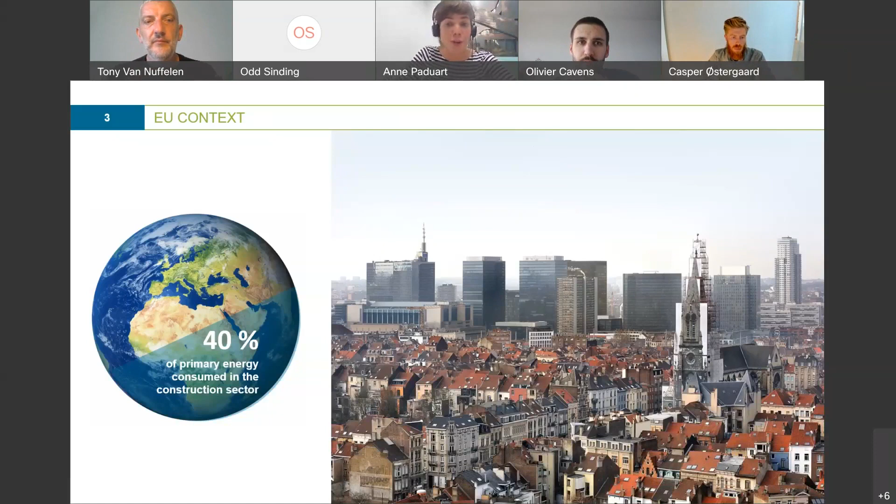We see that the building sector is actually a primary consumer of energy in Europe. 40% is related to all our construction activities, but also the emissions of greenhouse gases. When we look at the construction sector, it's about 40% due to the way we construct, the way we choose materials, etc. It's important to look at those numbers in more detail, because there are two points on which we can actually take some measures, take some actions.

So of course we see the energy parts, that 25 to 30% of the impact of the greenhouse gas emissions is actually related to how we live today, how we occupy buildings, how we heat and cool them, the technical equipment. And for sure that's something we've been working on in Belgium, in Europe, that we're trying to tackle.

But what we're not tackling yet nowadays is the remaining 10-15% that relate to the embodied emissions of the materials that we build with. So the selection of materials, looking at the embodied CO2 impact related to materials, but also how we assemble our materials in these buildings and how we keep them as long as possible in a loop.

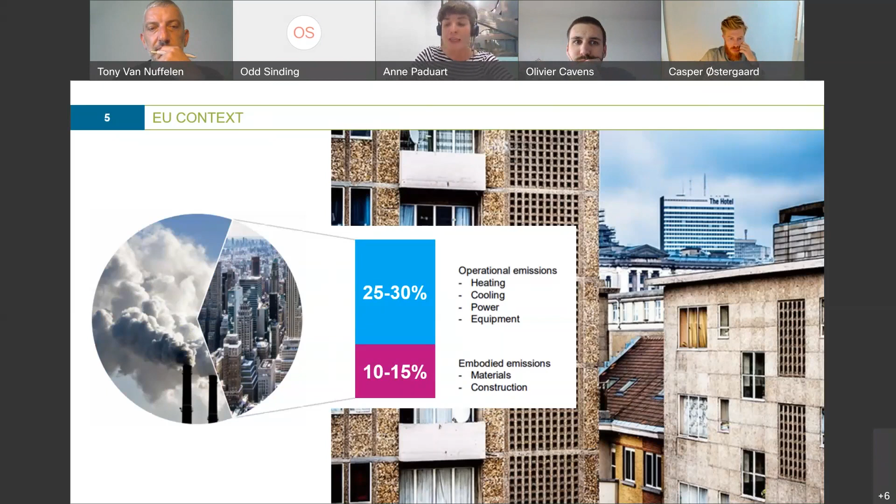That's something we should work on, and that's really the focus of circular economy: to try to reduce the way we put materials and deal with the waste coming from our construction activities. That's really, I think, the topic of today.

Besides, we already mentioned that when we look at raw materials extraction, 50% is due to construction, and in waste terms, 40% of the waste generated everywhere comes from demolition activities, but also from construction and renovation activities. So this is really an important attention point in Brussels and in Europe all over.

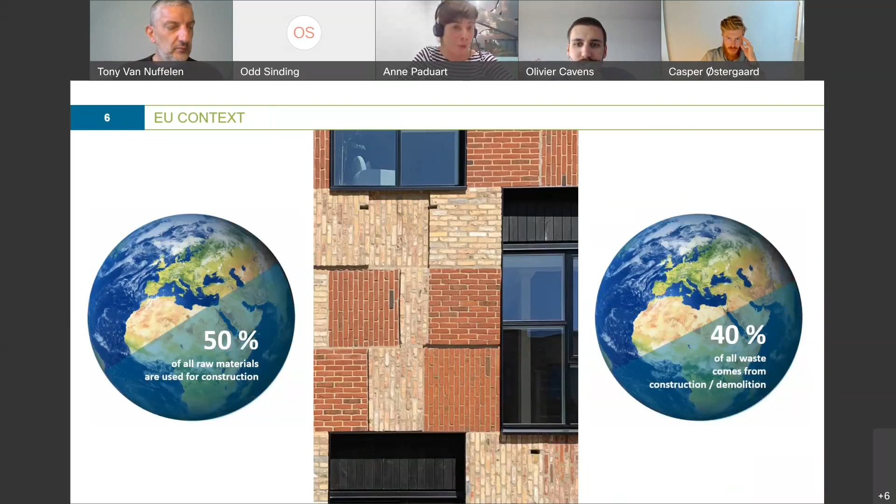The numbers I showed before come from the EU context, but when we look at Brussels, the focus points are slightly different. What's important for us is that we are conscious that the way we look at the construction industry today is too much just extracting, producing, using, and then disposing.

We need to take action today, or actually already yesterday. Especially when we want to push renovation rates up, we will see that the waste we're generating today will also increase if we want to renovate at a rate of 3% compared to the 1% we're seeing today. We need to work more efficiently with the resources we already have in Brussels and the waste we don't want to generate in the long term.

That's why for several years Brussels has been taking a mind shift, seeing how it can evolve from this linear model where we bring resources into our region and dispose of them outside of Brussels. We want to get away from that linear model, and we have ambitions towards 2030-2040 to really settle into a circular model in Brussels that keeps resources as long as possible in our region.

So that means there are several strategies we really have to focus on. First of all, in Brussels we already have a large building stock, and we want to see how we can maintain what's already there, the buildings that exist, and stop demolishing them if there's no good or proper reason for it. So how can we give a longer life to our buildings, but also how can we provide new circular plans to buildings that make it possible to transform them more easily from one function to another.

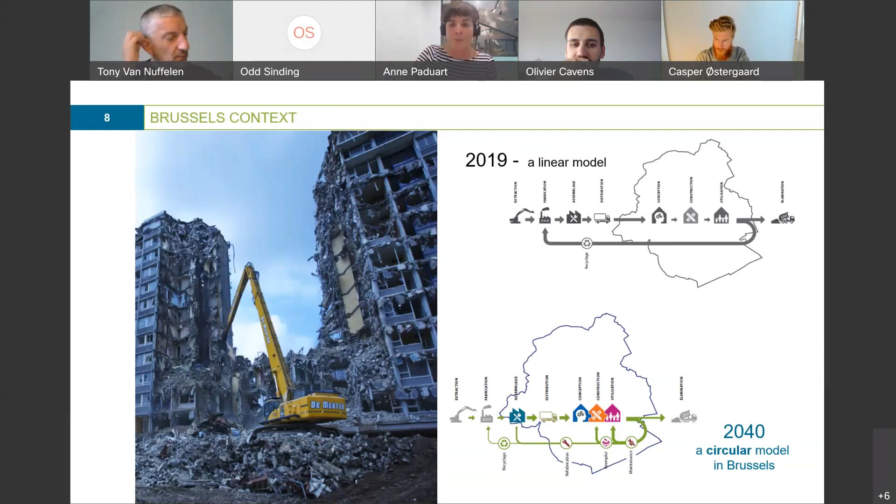In the context of the Brussels Capital Region Circular Economy Strategy, which in Brussels we call the PREC, there was this 10-year framework developed in 2016 to move the economy of Brussels towards a more circular model. The attention points were to develop economic opportunities linked to these environmental objectives, and also to see if we could relocate the economy to Brussels and create jobs.

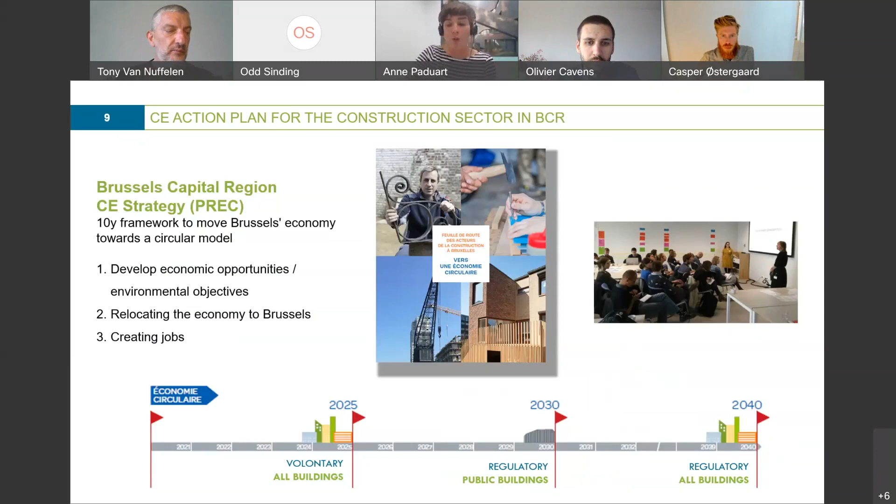The industry is starting to evolve towards having a high enough offer and demand. Towards 2030 and 2040, we want to come with a regulation that is obligatory, in the first stage for public buildings that should give the good example, and in the long term, 2040, for all buildings. So these are ambitions that we stated together with the sector that thinks we can actually achieve this.

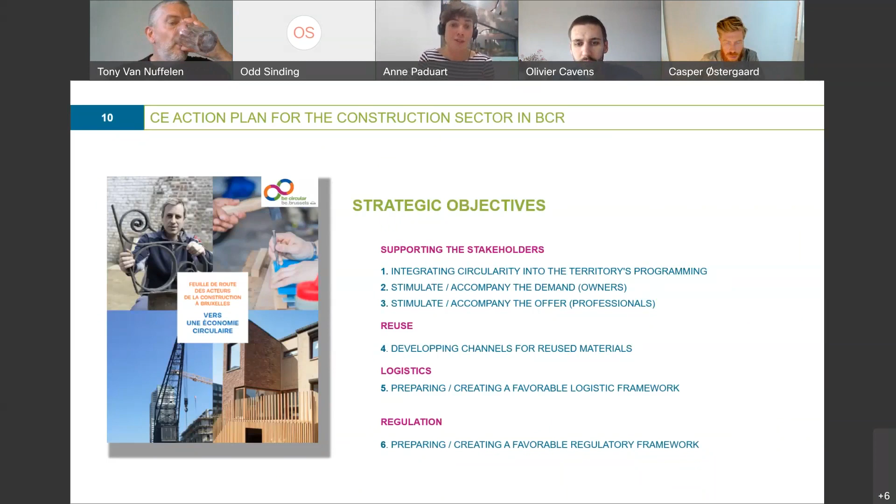The action plan was centered around four main focuses. First, really supporting the stakeholders on the territory, stimulating and accompanying the demand and the offer. Second focus is really on reuse, something we want to prioritize in Brussels, keeping our resources on the territory, but we also have to prepare a framework for the logistics and the regulation.

This is the general focus points we established in a larger action plan, which you can find online. Unfortunately, for now, it's only in French and in Flemish. I'm not going to go over all the actions, but there's an overview of about 140 actions that translate into numerous projects in Brussels, from which a lot have already started and are already taking place, but there's still room for improvement and future development.

My idea today was to show you some of the actions we've been putting in place and some of the really practical results, to show where we are today, and of course to show that there's still a lot of work that will be ongoing.

The starting point for us is really also learning by doing. We cannot just set a theoretical framework and wait until we know everything. It's also by pushing the industry and all the actors to really test out circular principles in their practice.

A nice initiative responsible for getting both small and larger projects to throw themselves into circularity has been the Be Circular call. Everyone can introduce a demand. There's of course criteria in terms of circularity, but the idea is that we promote upscalable concepts and upscalable businesses, and learn in these projects what the difficulties are and where we already are today.

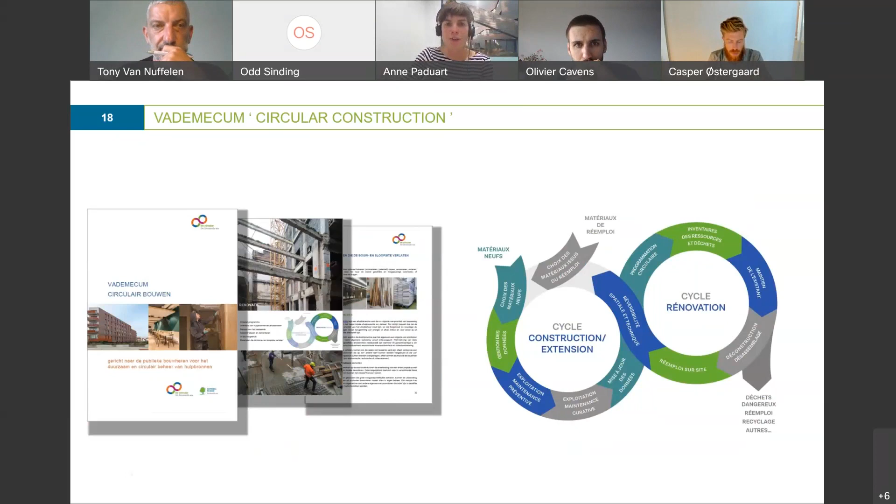That's really a reference we will update. It's been online since April, but we will keep updating it and integrating it on our reference site.

But let's not forget we also need to quantify the impacts and benefits of circular construction, and that's why the TOTEM tool was developed. Sorry, just to be sure—maybe one more minute? One more minute, okay, I'll go fast, but there's not too much left.

The TOTEM tool is important because we need to quantify circularity and its benefits. It's not just about qualitative guides—we also need to help actors like architects see the life cycle impact of different circular solutions and the benefits they can achieve. The TOTEM tool is crucial for that, and since it's a national tool, it's especially important.

Maybe on urban scale we also have some other tools—I'll just skip that part.

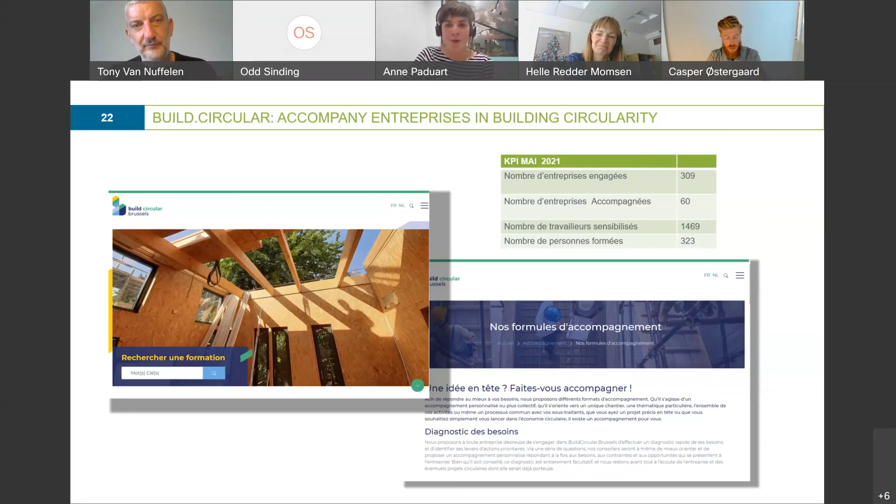To finish, we also give guidance to the professional offer and demand side, because they need to be ready to implement these actions. Build Circular and Hub Brussels are two examples where companies can get personal guidance on making their businesses more circular. We see a growing number of enterprises networking on this topic and preparing for what's coming next year. That's important work we're doing and supporting.

To link to the next presentation, we're aware that in Brussels renovation is key. We have an existing stock we need to renovate, and besides the energy story we're dealing with today, we need to implement the action plans we've established for circular economy. Wiebe Verhoeven will present more on this later, so to be continued, and we can discuss it further.

Yes, all right, so you see the right presentation and you hear me? Yes, good, perfect. I work in the Danish Ministry of Environment, and I want to shortly tell you about construction and demolition waste in circular economy in Denmark.

The building and construction sector in Denmark has the largest potential to transition into circular economy. The environmental focus for us is mainly about avoiding problematic substances in the built environment that can harm people and the environment during circular transactions of materials, as well as optimizing the utilization of resources we have in the built environment. We think this can happen with a focus on quality, flexibility and longevity, as well as making use of reuse, recycle and bio-based materials that we're slowly seeing integrated into the construction sector.

So if I can just get it to change. Might be a bit slow.

What we believe is that to do this requires very strong collaboration, not only in the industry and the sector itself, but also in government. We work closely with two other ministries in Denmark. I sit in the Ministry of Environment, but we also have a Ministry of Interior and Housing that handles regulation on building and building materials, with a huge strategy on sustainable buildings that will set CO2 requirements per square meter in all new buildings in Denmark. We also have a Ministry of Climate and Energy and Utilities that deals with energy efficiency. We work closely together, as I tried to illustrate with the arrows, across all these aspects that you would normally work within in Denmark to create a sustainable built environment.

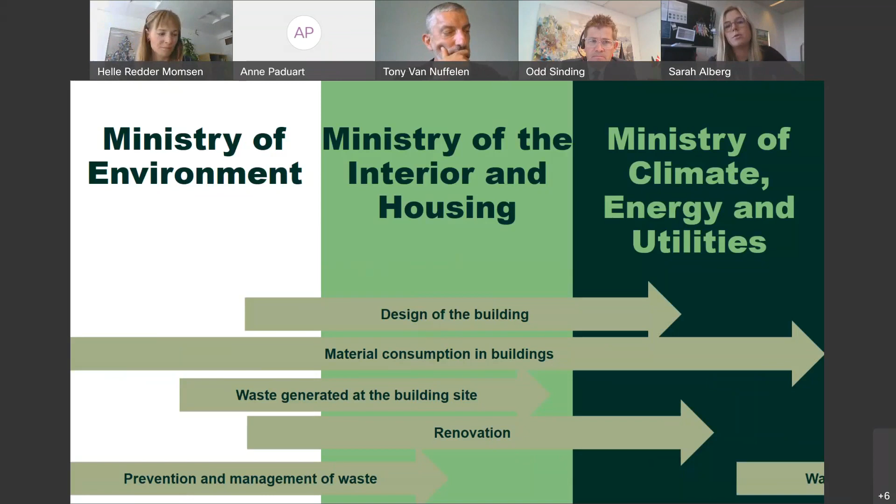We all have some part in it. We mainly sit with the prevention and management of the waste sector. We try to help with the right material consumption in buildings, and with design of buildings, but we work closely together. I think it's very important for us in Denmark that we don't have the rights to one strategy alone — we all help each other facilitate this process.

We heard before that we have a lot of waste produced. In Denmark, we have 5 million tons of waste every year just from the construction sector. That might not seem like much, but for a small country like Denmark, it's over 40% of all the waste we produce as a country. That's massive amounts. Of course, we try to prevent the production of waste to start with, but we also see that renovation and demolition of buildings has great potential for releasing materials to reuse and recycle, so they can get back into the circuit again. That's where our regulation really has a strong side.

Let me tell you what actually happens with our waste once you sort it, specifically in Denmark. The majority of waste from the building and construction side is material-utilized, which is considered low value according to the waste hierarchy. For example, it's waste that is crushed and laid on roads, where the material is used one last time as filling rather than being reused or recycled into new products. We also have a small amount that is incinerated or sent to landfill, but that's mostly when we find PCB, asbestos, or something we don't want to recycle.

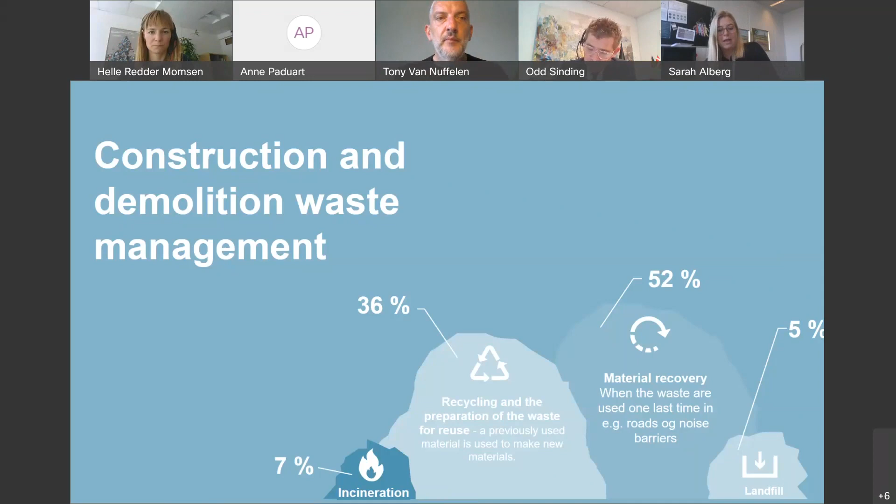I brought the Circular Economy Action Plan for Denmark to pick out some examples of how we try to increase the recycling rate, but also reuse and prevention rates. In July 2021, not that long ago, we published a national waste prevention and management plan. We tried to set out long-term targets in it, but we'll probably revise it, since 2032 is a long way off — we might change some targets if we get there faster, fingers crossed. The plan covers all aspects of circular economy: plastics, bioresources, circular business models, eco-design. It's a massive plan with 129 initiatives. We deep dive into some specific sectors, and building and construction is one of those sectors.

I brought you two examples, one that we finished and one we're still working on. The first is an initiative where we wanted to update our legislation because we want more traceability. For Denmark, it's really important that if we pursue circular economy, we don't reuse or recycle materials with harmful substances — the PCB scandal is still big in Denmark, and we try to prevent anything like that from happening again. We think it's very important to have trust in the materials we reuse or recycle, because if you have one or two big scandals, people will probably stop using them again. So we want to make it safe to recycle and reuse them.

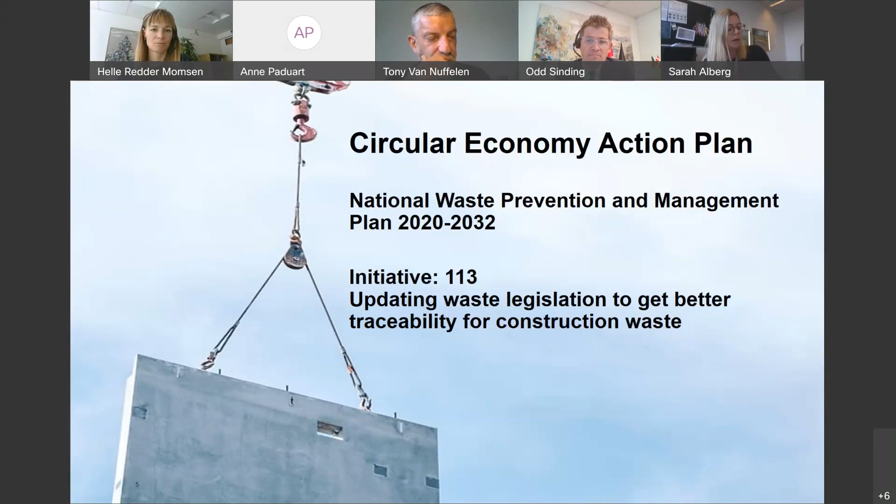I'm not going to go into details with the initiatives because it's very specific, but it's an example of how we changed the legislation to support the circular economy. So what we did was we set out 4 steps that you as a builder, if you are to demolish or renovate a building, you have to go through these steps, and I compressed them here, so it's easier to read for you guys.

You have to start by doing this review of the building, finding out what kind of waste is there. Is there any dangerous waste that we need to take care of beforehand? And you would go out and check for yourself.

Then before you can actually tear down the building, you have to notify the municipality so they can make sure that they have all the right chains for the waste to be handled, so that they can try and push recycle rates up. And you have to notify: does the building contain PCB and such? What type of waste do you have? How much of it? When will you bring it to the municipality, or which kind of company will handle it for you?

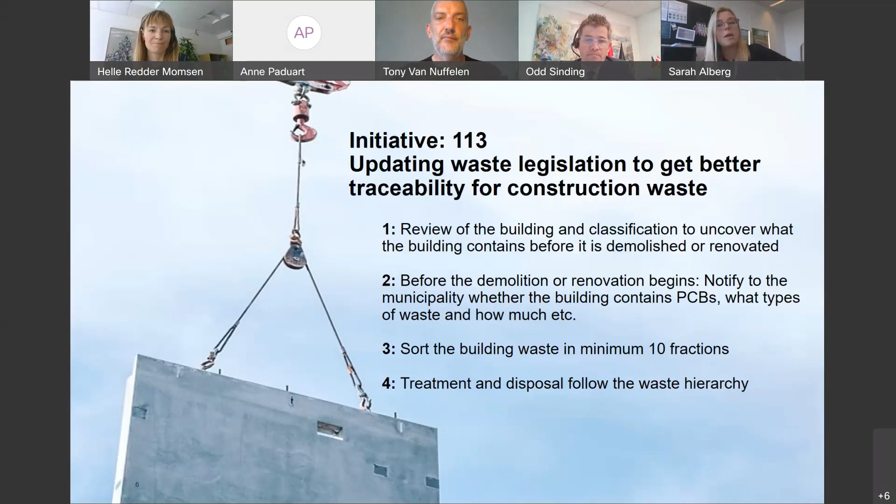Another one, my last example, is selective demolition. That's where the building is demolished in a way that the material can be sorted out correctly and therefore used in the best possible way, while we also sort out the harmful substances.

So it's a kind of more theoretic thing, but we set out that we want requirements on how everyone in the build sector is supposed to do this. And we want to introduce this to our legislation in '23. So we're starting to prepare the legislation already.

But in order to make such demands, you need a lot of knowledge. So a couple of years ago, we started gathering knowledge about selective demolitions across Europe and integrated with the university. We are not ready to publish the current results, but for you guys, I can tell you...

...that the life cycle assessment that we made for a lot of different selective demolitions concluded that, as you might know, it has the best environmental impact in all the categories: CO2, water supply, everything was very positive. So it's good to know that it's the right way, at least for Denmark, to go.

I'd like to make a link with what Sarah was telling us about different ministers. Here in Brussels, we launched the Alliance, the Renolution Alliance, which is an alliance of different public services and the private sector too. I'm part of the operational cell of the Renolution.

Just a little short story: 65% of greenhouse gases would come from building and construction. In Brussels, 33% of the rooftops are not insulated, and 40% of the buildings date from before 1945.

We got a lot of actions that have been determined in 5 big themes like finance, simplification, support or guidance, and regulation.

The main goals are, like Anne Paduart already told us, to triple the number of renovations yearly, to rationalize the use of energy in the buildings, and to have a better quality of renovation. That's why we created Renolution Alliance.

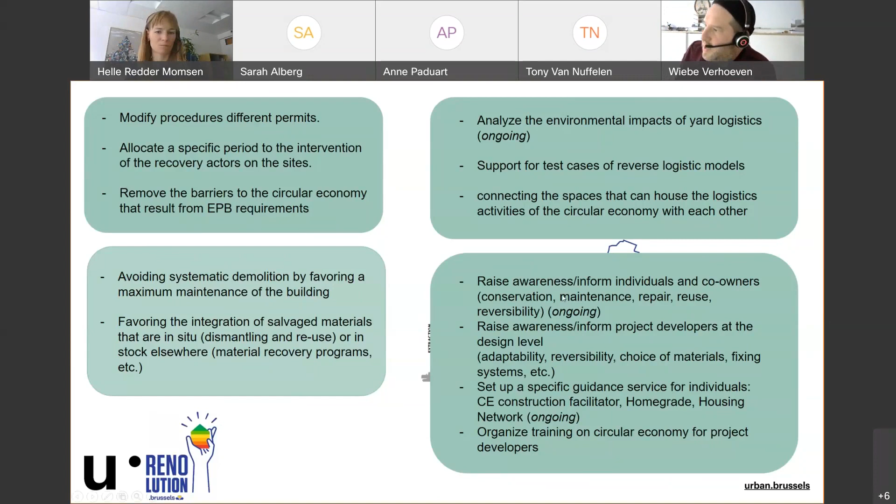Like circular economy is sometimes stopped by the EPB requirements, and that's an issue we have to solve. On the other hand, for example, raising awareness across all different groups is what has to be strengthened.

More concretely, the Renolab is one of the actions that is also transversal and taking shape. It's on two big chapters: one is a little bit top-down, Renolab ID, about finding solutions that can be applied on large scale. And then Renolab B of buildings is proposing good ideas, trying them out and seeing if they can be used for others.

So Renolab ID is a call for projects. It's open now, still for 10 days. It has to be innovative, have large scale potential, and we're going to test the technical and financial feasibility. Some examples: it could be very large, from the real building, maybe a whole neighborhood instead of one house after the other with different contractors. But also, for example, alternatives of financing or digital tools that might help. So the call is open, you can find it on renolab.brussels.

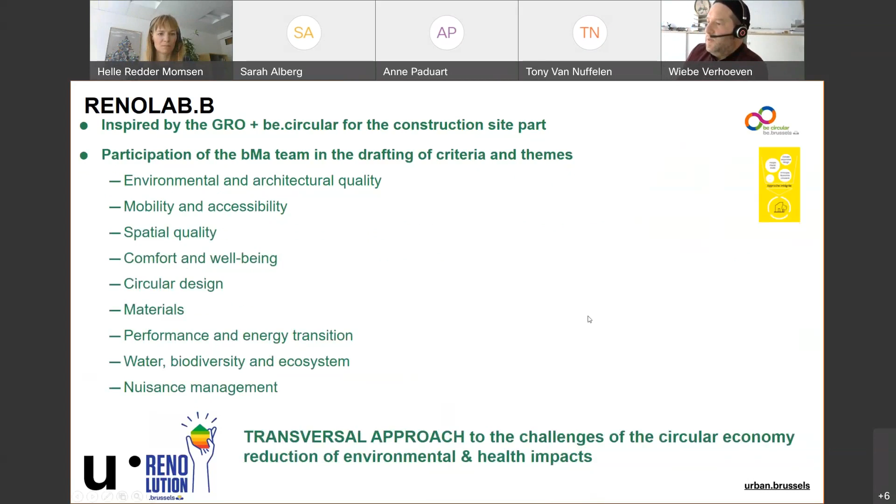The design stage is the circular and sustainable design of the project, for which you can be guided. Then we have the execution side, the moment of phase where the owner, but also the contractor companies, can find support with us for this. Important here is that Renolab will be inspired by Be Circular, like Anne already told, and the GRO. The participation by the Brussels Bouwmeester en maître architecte and his team is very important for us, with a lot of criteria to follow. So this is the transversal approach that we are having.

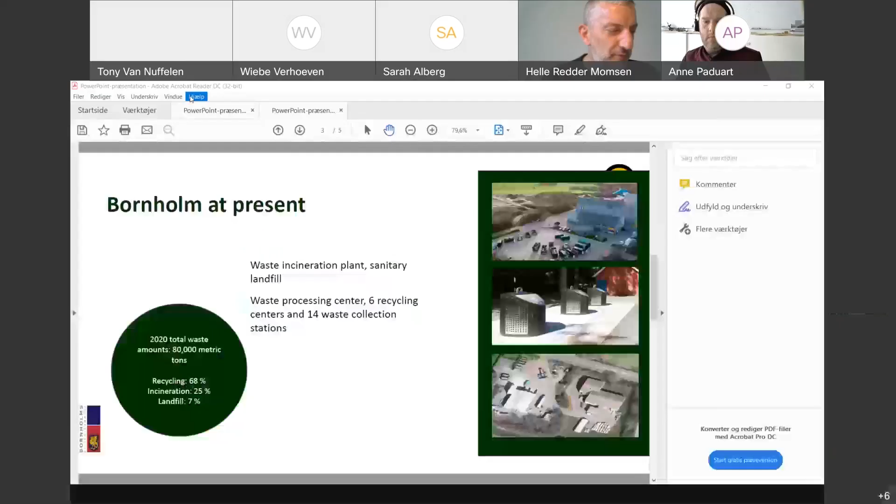Thank you, Wiebe, for the Brussels vision perspectives. Let's go to Denmark and see what is happening for the island of Bornholm and the vision they have to be waste-free by 2032, and how buildings can contribute to this. So I give the floor - I think it's a double presentation, first Jesper and then Rocio. So Jesper, the floor is yours.

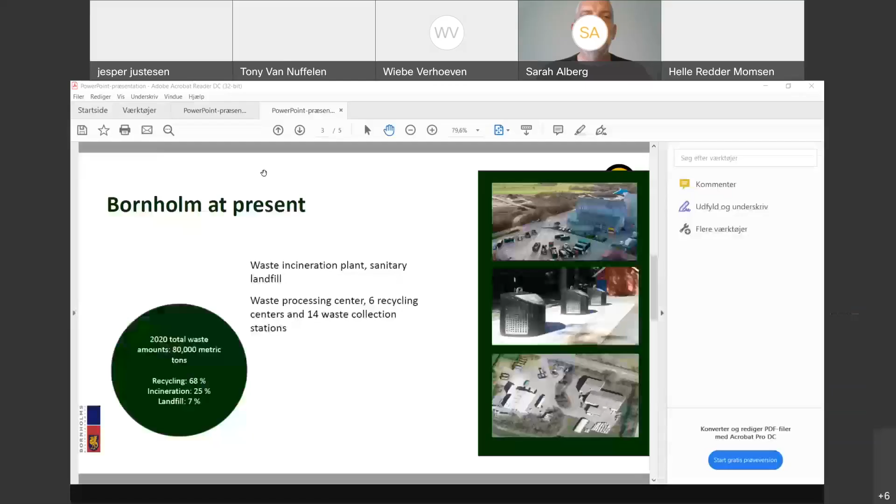I think we have issues with the presentation, it's still not visible. Yeah, I have problems with the sound. Now I'm on the sound, and now I have to share my presentation, but the share button is locked. Okay, it's back again. Okay, there we go. Now I'm ready, sorry for the problems. Yes, perfect, welcome.

My name is Jesper Justesen, and I'm head of the Environment and Project Department at BOFA. Bornholm is a small island in the Baltic Sea, and BOFA is the local waste treatment company under the regional municipality. In the next 4 slides I will talk briefly about BOFA's vision and about BOFA's work with waste in the construction and demolition industry. After that, Rocio Jensen will talk about the circular economy in the construction and demolition industry at Bornholm.

BOFA has named our vision 'Bornholm showing the way without waste in '32.' It means that in '32, all waste at Bornholm is treated as a resource. BOFA has therefore planned the shutdown of the incineration plant in '32, and we now need to find new ways. We need a lot of good ideas, and we need also committed partners.

As you can see here, these are some pictures of BOFA's facilities. BOFA has 42 employees, 10 of them in my department. We have an incineration plant with a capacity of 20,000 tons, a sanitary landfill with a lift of 40,000 tons, a waste processing center with a cardboard and paper sorting plant, 6 container sites/recycling centers, and 14 small waste collection stations as seen here in the middle. The total waste amount was 80,000 tons, and we recycled 68%, incinerated 25%, and 7% went to landfills.

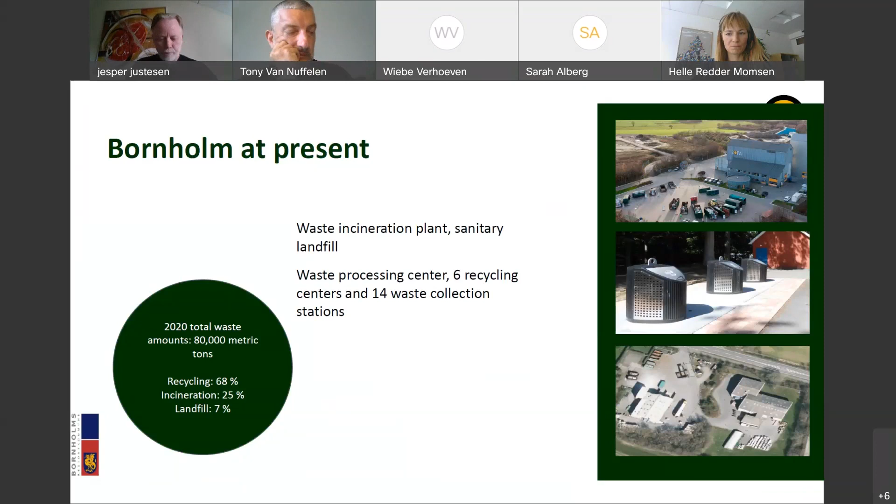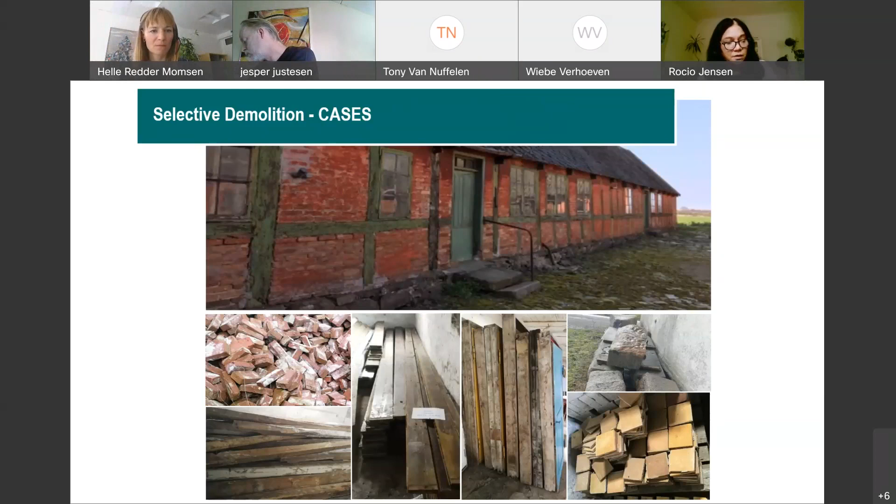We also look at how our building stock is doing on the island, and out of all our empty houses, how many of them are really ready for demolition, or couldn't be rescued to be used again. We found that 42% of the empty houses on the island are ready for demolition.

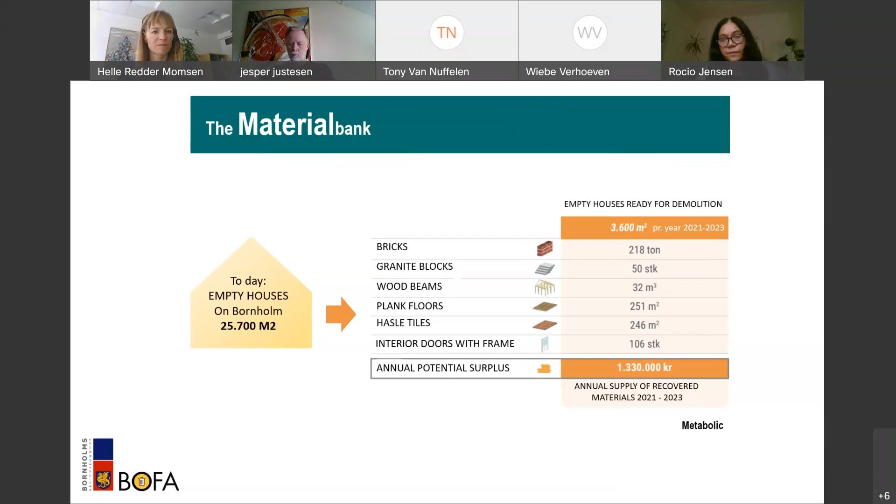If we take one third of them each year, we would have an economical potential of 1.3 million Danish crowns a year by selling these extracted materials in the coming years, with prices from today's market.

We also make some projections, trying to look at how it will look in the next 10 years. We look at the material streams from construction and demolition, from a demand and supply perspective.

Through these demolition project cases - real cases in real life - real materials came out to circulate. One example is about bricks, which was the bigger portion of materials.

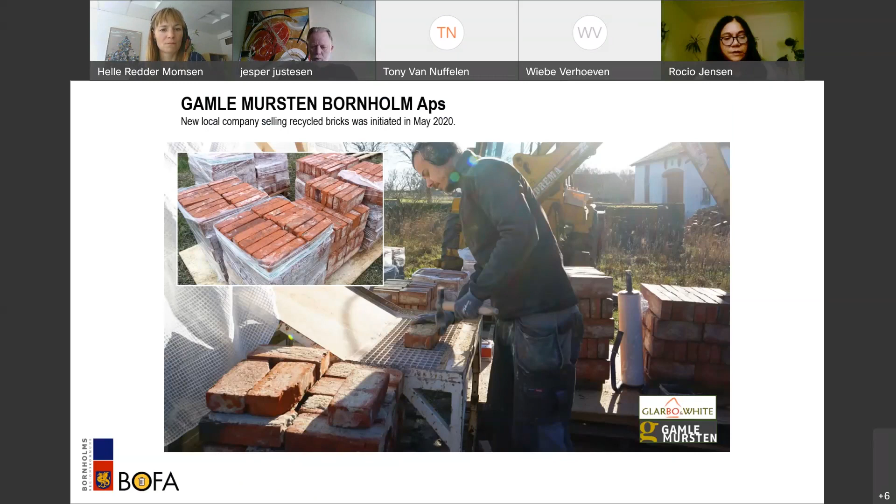In May 2020, a new local company selling recycled bricks was born on Bornholm. Our project offered a startup delivery of 40 tons of recycled bricks to this company and facilitated a long-term delivery from BOFA.

The project aims to increase the recycling of building materials and components by developing an integrated tool and system to easily identify and disseminate valuable materials from one building to another.

There are three elements in the project. First, a tool to map and describe key data on valuable materials from renovation to demolition. Second, a digital platform as an interface that relays the identified data directly from the screening tool to an existing material bank. Third, the physical storage itself, where materials wait to find use in new building projects.

That's our work for the next couple of years. The tool will be supported and implemented by existing circular construction networks such as our own, the Green Building Network on Bornholm, where we can address this tool to medium-sized craftsmen and contractors, helping make it friendly to the small-scale companies we have on the island.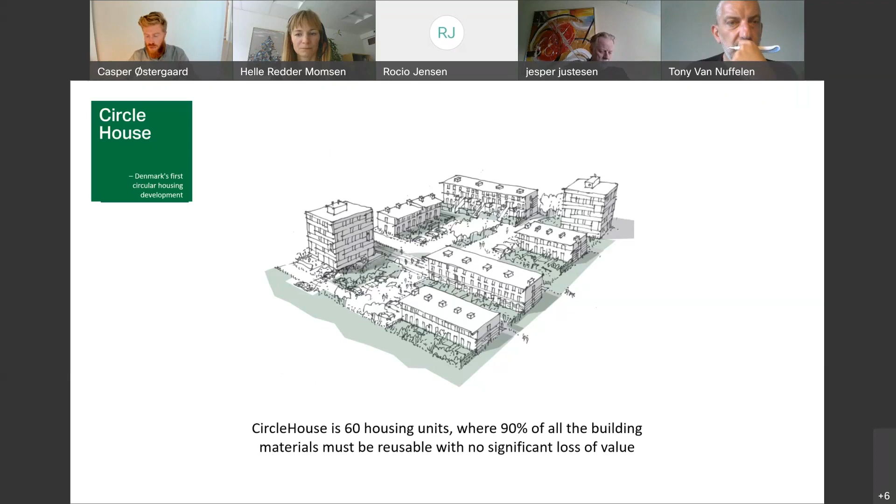So far, the highlight of the Circle House project, which isn't finished yet, is the demonstrator. We had a virtual tour of it last week with Helle as well. It's a one-to-one mock-up of the building system, but also an experimentarium of different circular materials, where the industry can come out and discover and experience these circular solutions. That's been a highlight so far.

Okay, so to the resource block. Where Circle House focused a lot on the building mass we're going to build in the future, the resource block looks back on the building mass we already built, that we also need to deal with, because we are tearing buildings down and adapting our building mass.

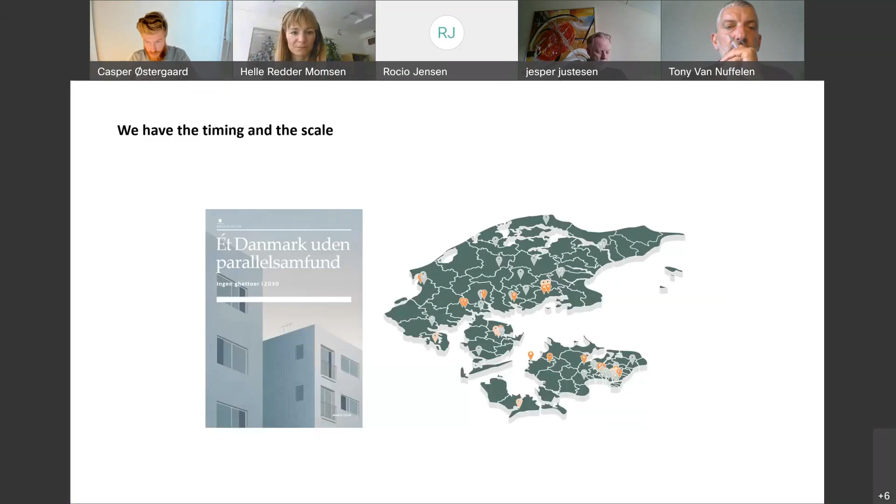The Danish government has published a goal called Denmark Without Parallel Society. Basically, they don't want any ghettos in Denmark, and the way it affects our building mass is they have a timeline with a certain set of criteria for areas. If you fall into this category, you're categorized as a ghetto, and if you stay on the list more than 4 years, you're categorized as a hard ghetto, and then you have to transform within those 4 years.

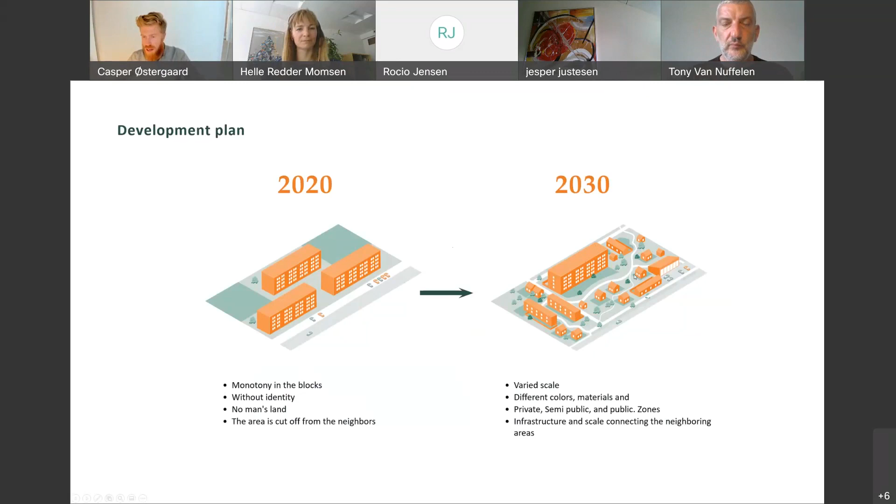Basically that means the building mass is going to be transformed, so only 40% is left of these blocks, and the rest is transformed into less dense, more largely structured, and more diverse building mass.

But when we're doing this exercise in terms of doing something good socially, there's a lot of resources getting lost in tearing down 60% of these building masses. And as Sarah just told us, it's a lot of building waste we get out of this — 40% of all waste in Denmark is this pile over here.

So in the resource block, as the name hints at, we want to look at it as a block of resources and not just waste. We want to take these building blocks and transform them into the new construction that's going to be put up instead of the old building blocks.

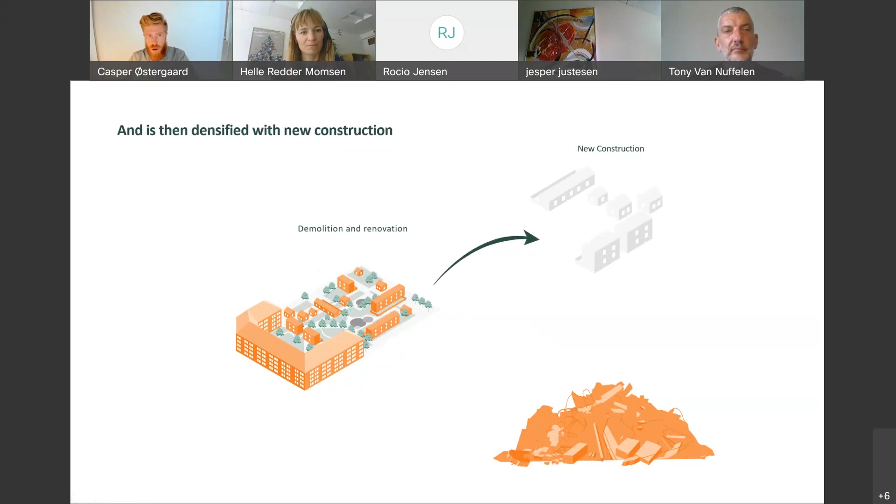We want to go from this rubble into actually dismounting the building elements into something we can use. Here's an example from the Netherlands by Super Local.

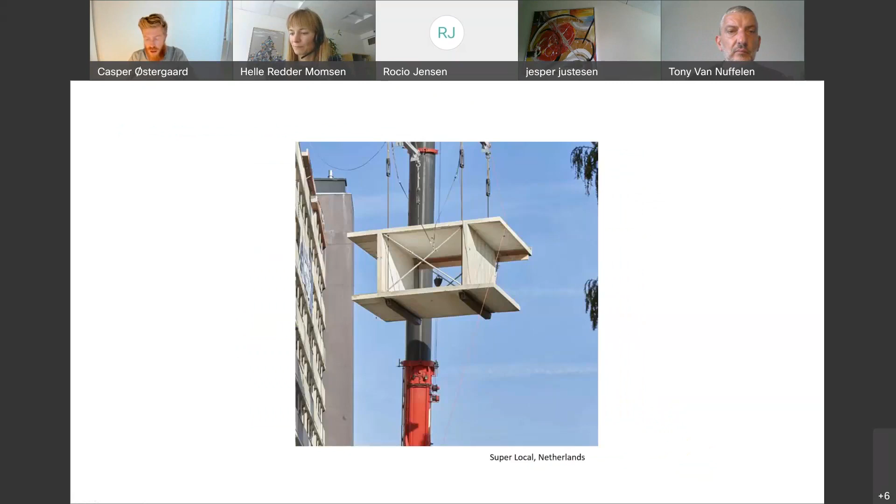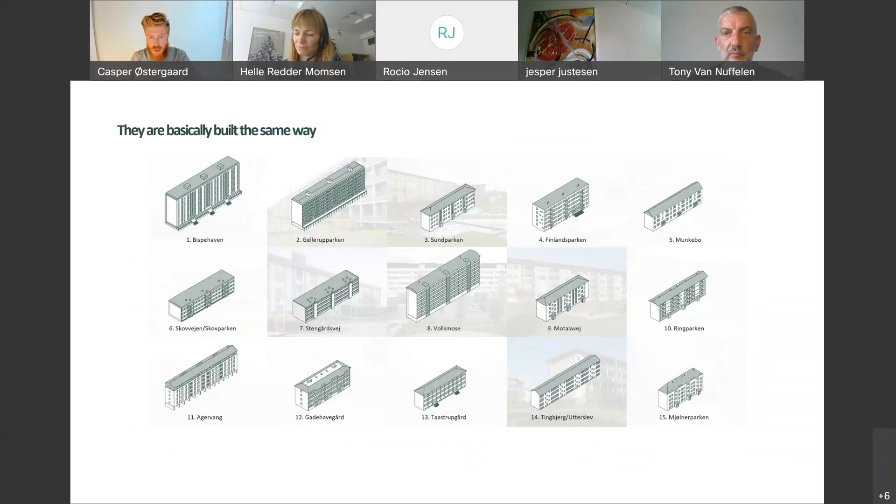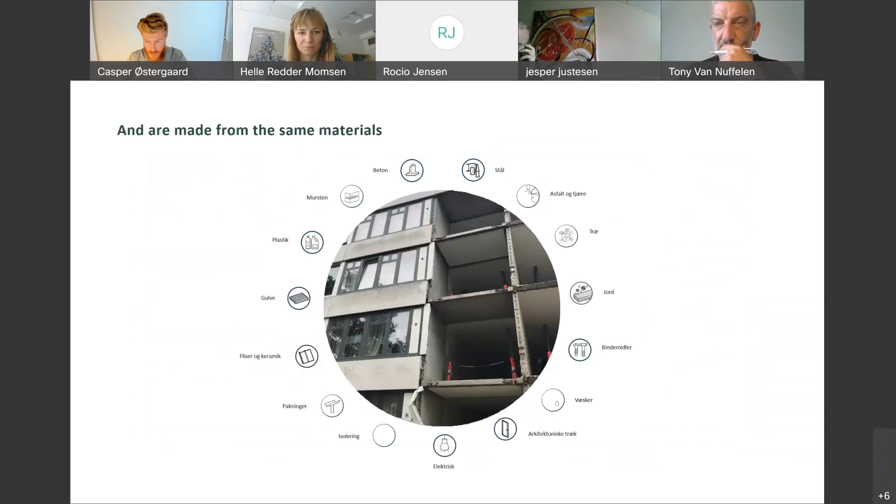We went out and took a look at the 15 toughest ghettos in Denmark and analyzed the building system behind them. We found they are made from more or less the same materials, all of them. They are built from concrete elements — we do a lot of that in Denmark, and we were especially good at it back in the 60s and 70s.

The difficult thing here is that it's not made to be disassembled again. Everything is reinforced and just cast together, so it's just one big coherent mass that you can't disassemble, like we have done in Circle House, which is also made in concrete.

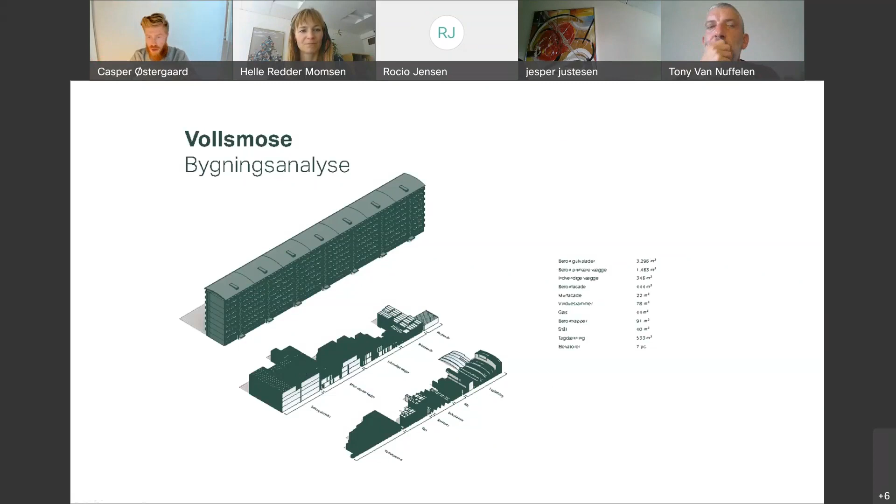This is a bit blurry, but we analyzed the entire structure, divided all the building materials up into different piles — not physically, but on an analytical level — and then mapped out the amounts of material we have: everything from the concrete to the interior walls, facades, glass, stairs, steel, and elevators. We just mapped it all out, laid it all out, and saw how much it was.

And then when we had these building blocks and building materials, we could also do an LCA, a life cycle analysis, and a resource impact mapping of the materials inside the building. Basically, it's pretty easy when you have the figures.

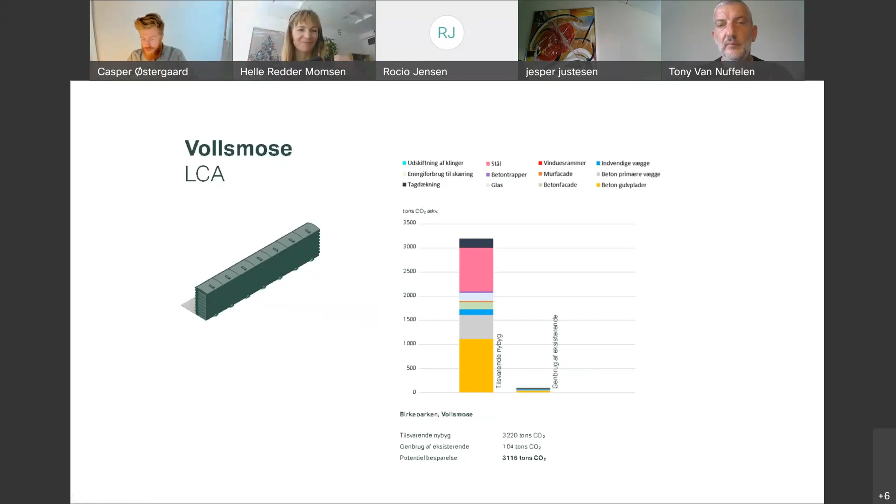So basically, it's from 3,200 tons, and it would only take 100 tons to reuse this into a new structure. So we would save 3,000 tons of CO2 if we're able to take down this concrete structure and then rebuild it into a new structure.

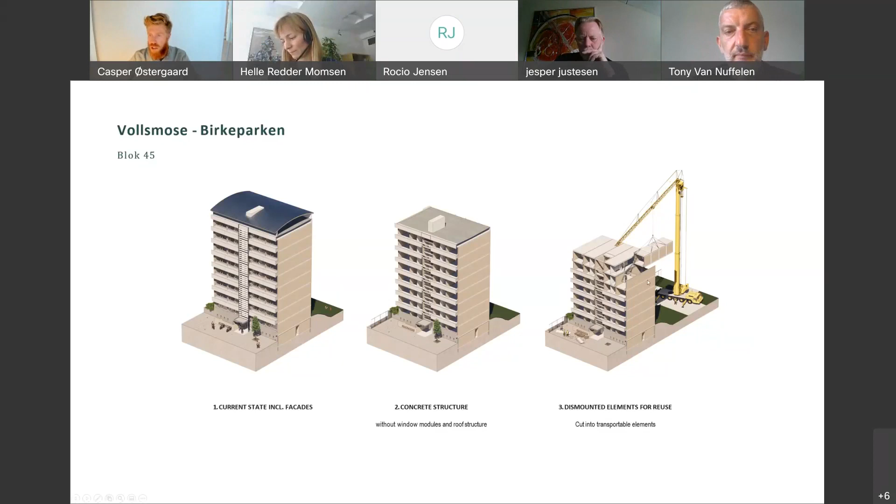So the way we look at the approach is: we have the current state of the buildings, we strip it of all the windows and roof structure, so we have the bare concrete structure, and we dismantle it—here's an example of cutting out a building volume, a building space, that can then be reused one-to-one. But it could also be cutting out the slabs, or the walls. The slabs are also super easy to reuse.

And then the next part is, what can we use these building elements for? So we've been through this design exercise, combining it with wood materials and adding new facades—again all following the design for disassembly principles. For example, adding a prefab facade module, having a facade system designed for disassembly.

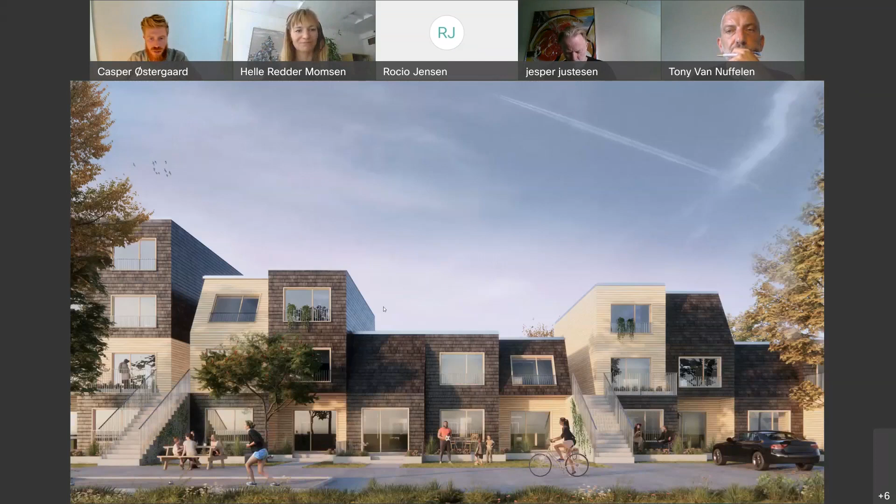And all in relation to the design for disassembly principles, like having all the electricity put outside the wall, so it's easy to remove again. The aim is to create a whole new, more or less village-type structure out of these old building elements, combined with the old building blocks, to create a new way to live together—so for the blocks, but now also a denser row house that could attract other types of people. Yeah, that was a super short fly-through of that.

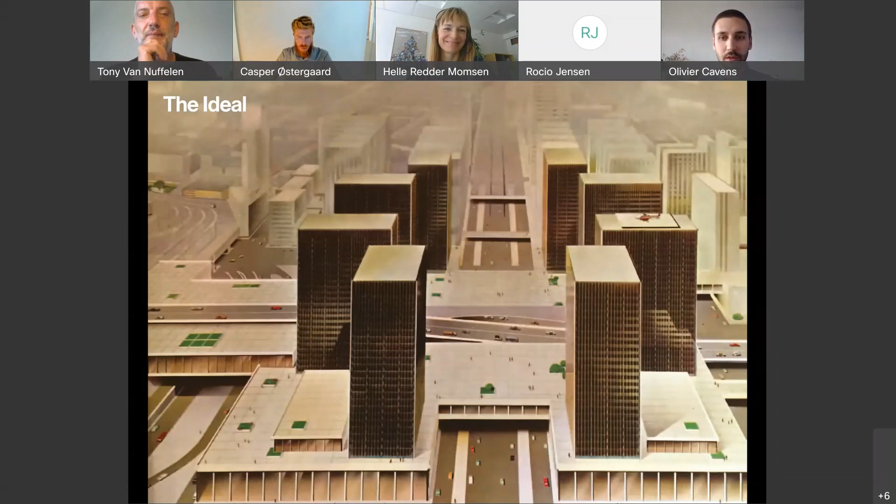So just to situate ourselves, the project concerns 2 towers out of 8 towers which you see here, located north of Brussels, which back in the day were meant to be the center of a business district, the crossroads of a highway going from Amsterdam to Paris, and one going from the seaside and London to Berlin. So these are the 2 highways you see here. This was the ideal scenario that was installed back then.

And this is the actual project we're talking about, which was also built, but shown in an idealized environment, where cars drive on one level and pedestrians circulate on level 3, separating the fluxes. But this was actually never built. It was a kind of megalomaniacal approach to overhaul the city as it was back then. This was never installed, but it was the vision with which the project was built.

So this mismatch resulted in a trauma, let's say, for Brussels, for a lot of people who were residents in that area, who had to be expropriated and move elsewhere, or move to other buildings built in the same block. But this was reality for quite a long time.

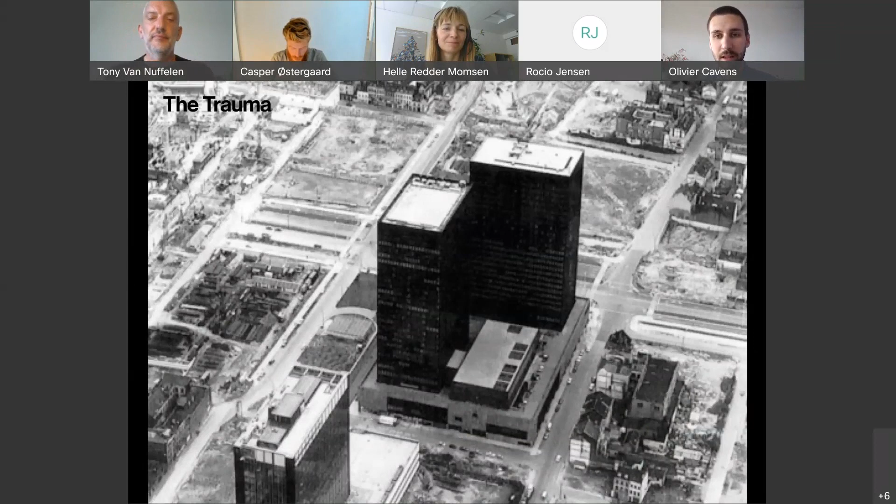So this is the first project that was realized of that big Manhattan plan, as it was called, with all the empty plots around it. The neighborhood didn't like it. And so nowadays we find ourselves still in a situation where there's a lot of friction and confusion.

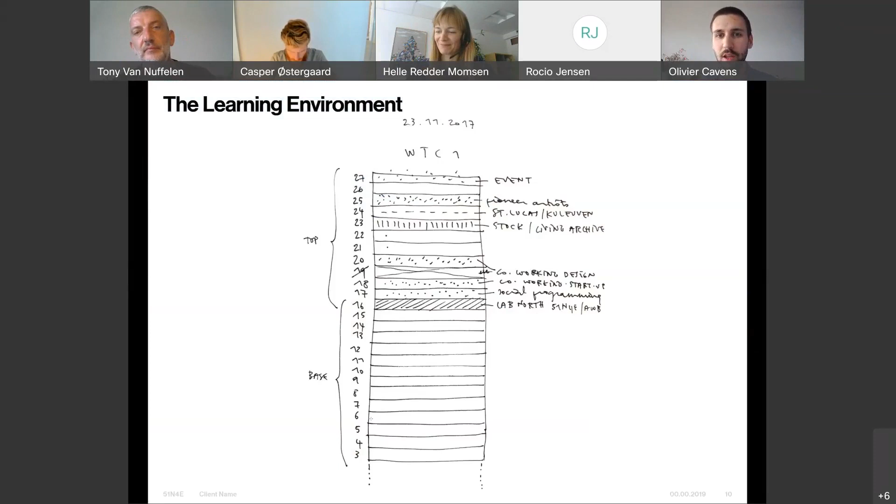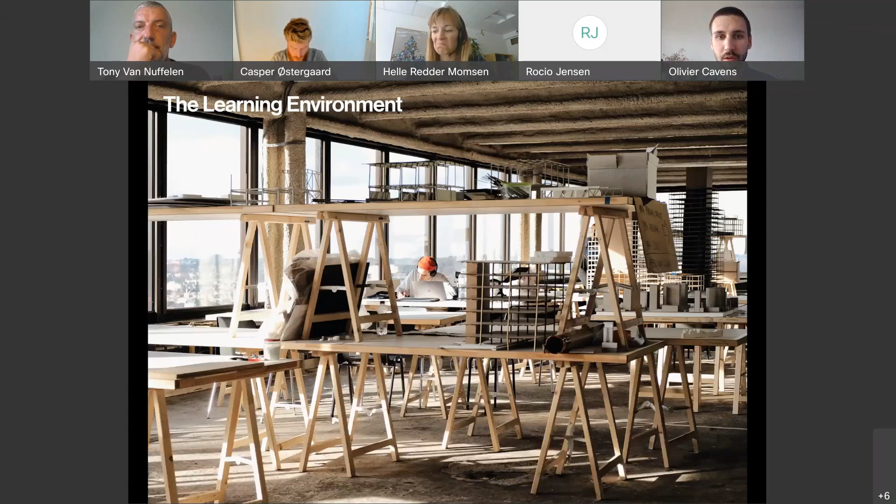So the first thing we did was to install ourselves in the building together with other people, to actually, from within the project we would do for these towers, think about it in a plural way, and to open up the building to a different type of user than what it was meant for. So here you see a university occupying a floor, where students thought about different types of projects in the neighborhood.

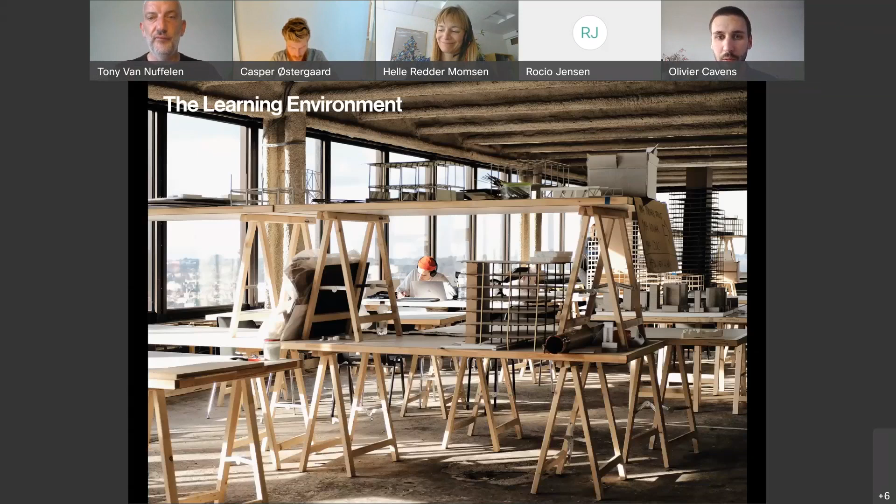There was an exhibition organized, so the public could all of a sudden access this building, which normally they couldn't because it was an office building. So people started encountering the qualities of the building, like the panorama you have here on this floor.

And we ourselves, as architects, also installed ourselves in the building. We made an atelier with all the stakeholders, thinking about what the future of the site should become, and living the building as such. So here you see a mock-up that we made in one of the empty floors of the towers, which was thinking about a potential renovation of the building into housing units.

So you see a kind of covering of the structural floor slabs as they were, with gypsum board panels made to measure, to have the most ceiling height. This was all done on site and was actually part of the process. So we didn't think of the building as something abstract from our own office, but it was really on site that we saw what made sense and what not.

So in terms of circularity, we really treated the building as a bank of materials, let's say. So the two towers, called WTC 1 and 2, we started scanning them, so the whole building was inventorized. And with that, we were really able to check which materials could have which new purpose in the future.

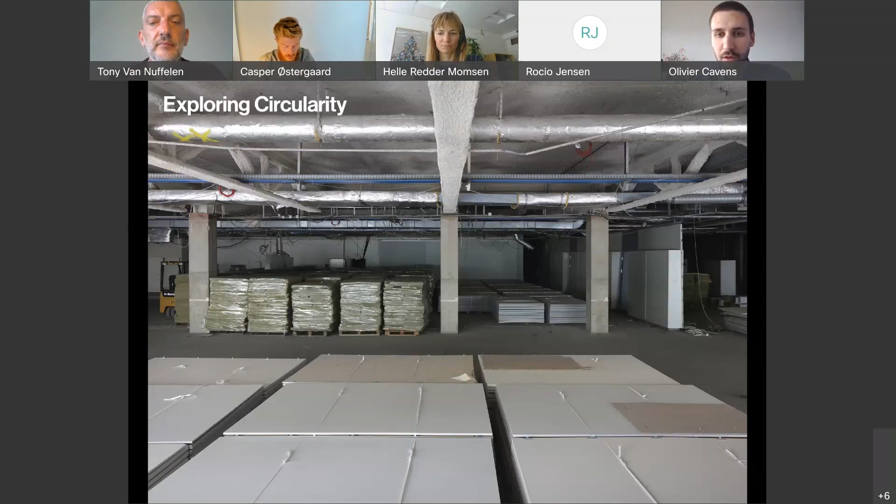Here's another example of terrace tiles, and I will elaborate a bit on this one. This is the roof terrace which, in the old master plan, pedestrians should have walked on, but that never came into being, so the roof terrace actually was never properly used.

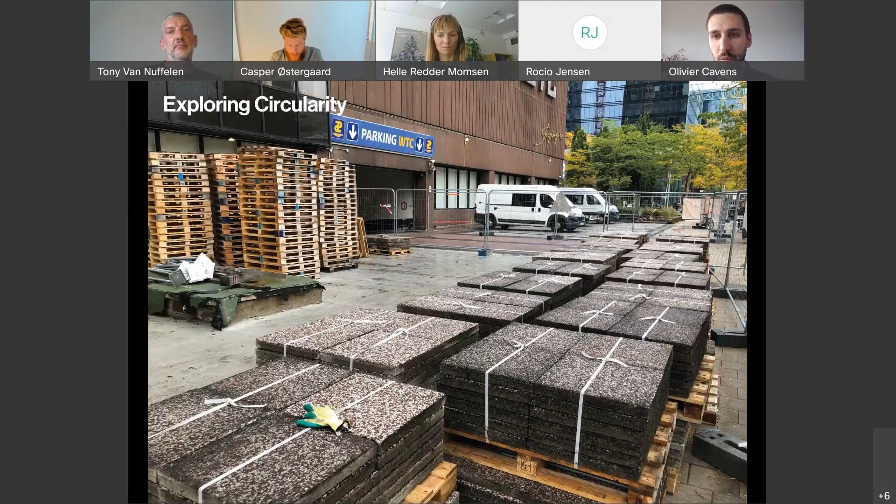The tiles we recuperated were all stacked on wooden pallets to be able to bring them elsewhere. They are at the moment stocked near the canal in Brussels, only one kilometer further up from the site. It's a huge amount of tiles.

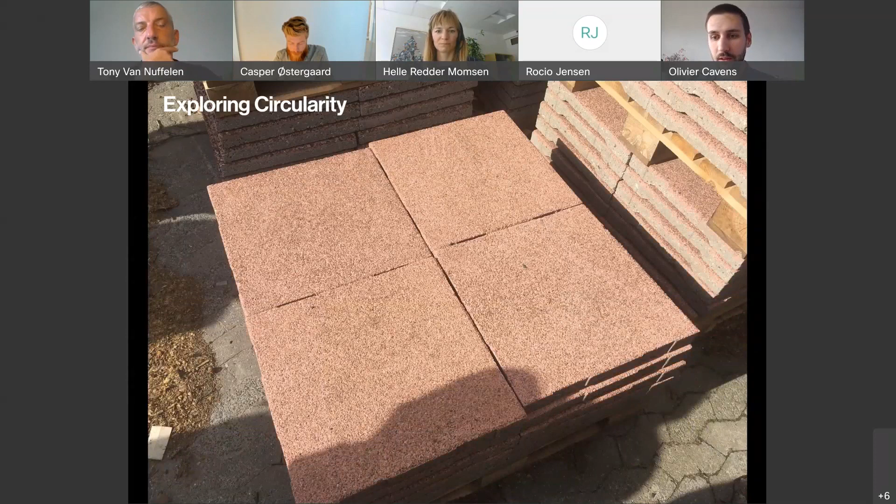They are now being treated to clean them and make them usable again. When you see the result, it's actually like a new tile, while this tile is at this moment almost 50 years old. So the quality is not less than a new material, it's only demanding effort in demounting, treating, and bringing it back into a second life.

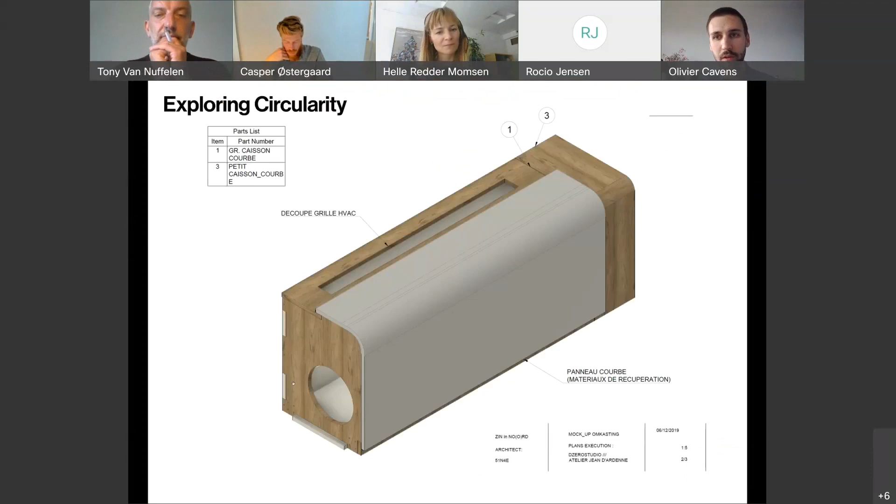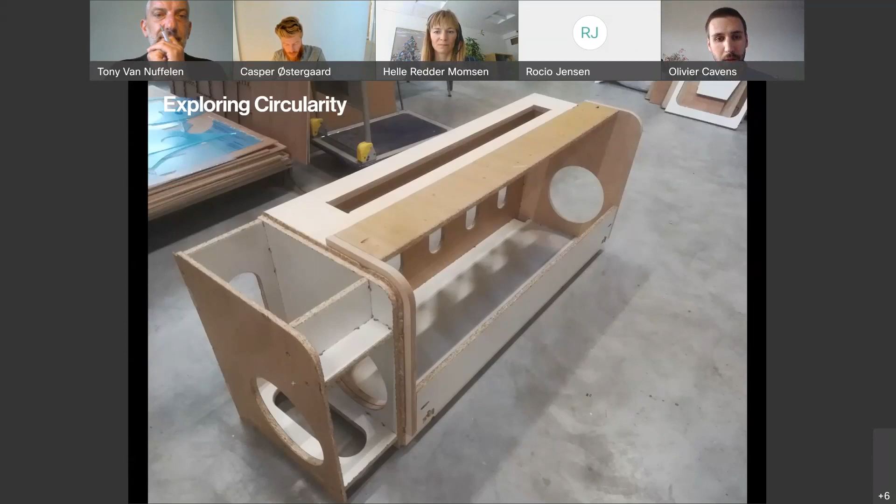Another example were facade cover panels, which were present across the whole length of the facades in the offices. Same process—we thought of a way to reuse them in the new project, so we started testing it, making mock-ups. This is a mock-up where the bent panel was mounted on a new support, which we tried to make out of very cheap, low impact material, as you see here. This was the result of the mock-up, with which we proved that this material could be reused.

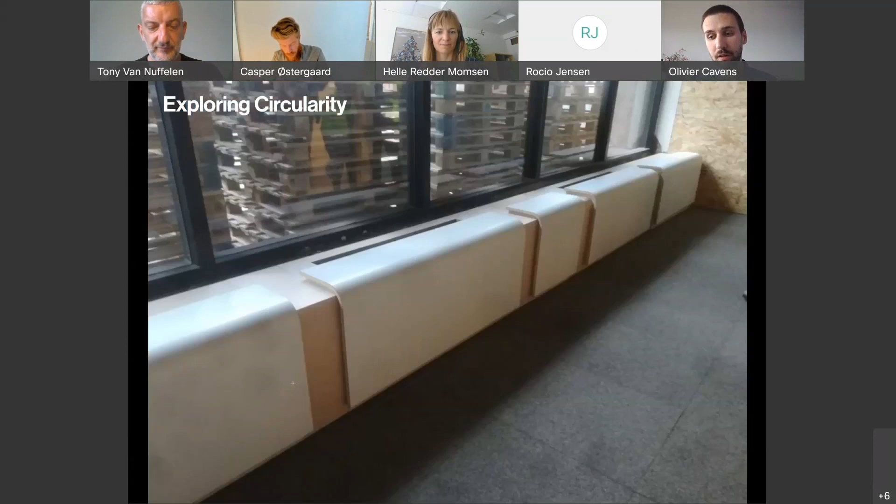In the end this didn't happen, because of cost, because of risks, and because of the maintenance procedures these panels would need to go through. So in the end they weren't used inside the new project we were making, but elsewhere, in new furniture that is now living in living rooms in Brussels.

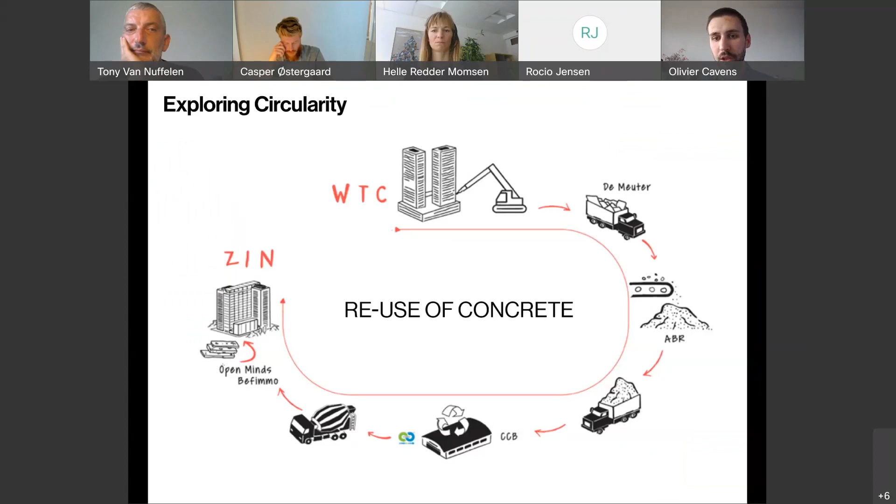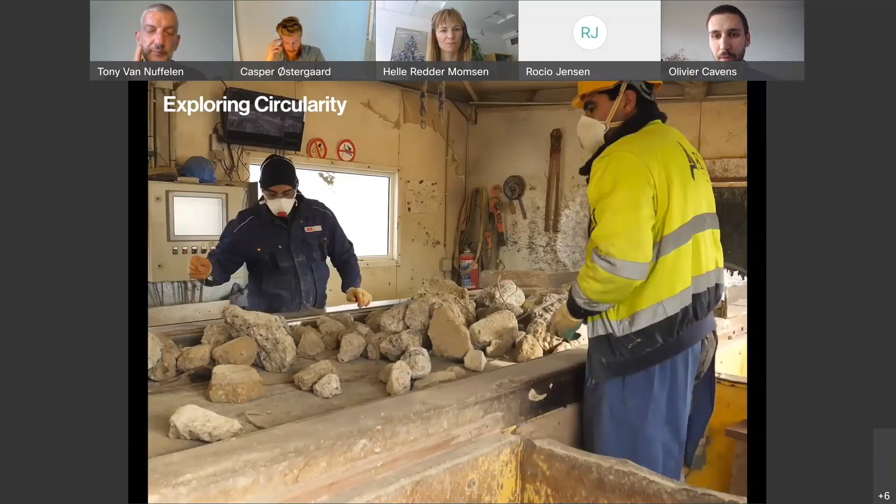I think a third important step we made in the project on this scale is the reuse of concrete coming from the two towers, actually being reused in the new project, which I'll show later. This involved really separating the concrete first and breaking it up into large pieces, then going to a treatment site—also near Brussels, so it doesn't take a lot of transport—where it's crushed and sorted into different sizes, and then tested to see what quality of concrete it can become again in a new application.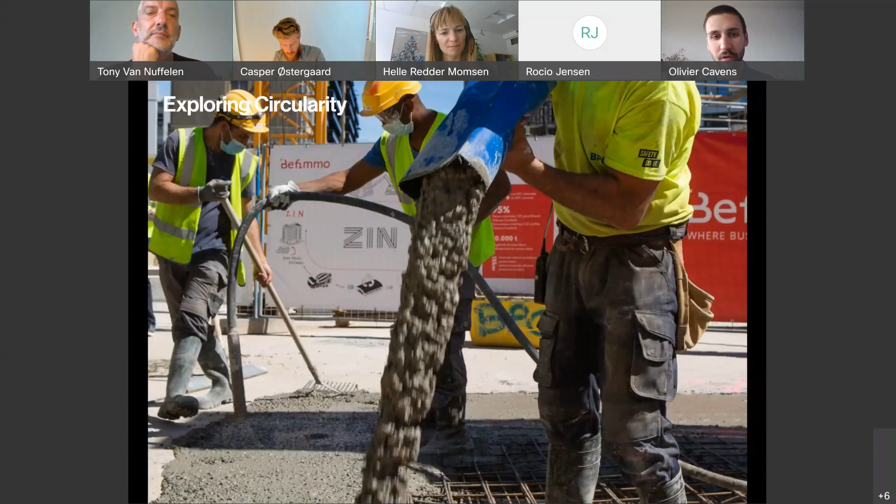So recently, a few months ago, the first concrete with these reused aggregates from the old concrete was poured again on site, as you see here. This is where the circle was made, let's say. It's a very big step, certainly on such a scale, on such a huge project—this is very new practice in Brussels.

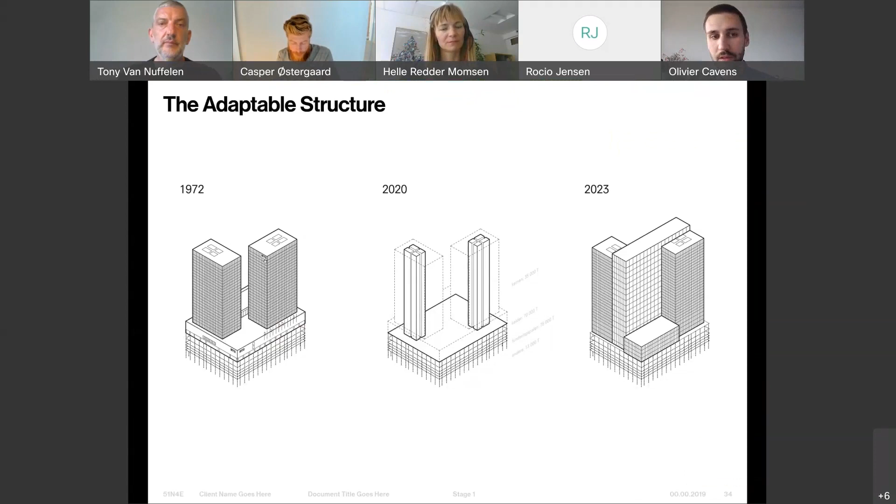With this in mind, coming to the project, just to show you a bit what it's about: on the left you see the two towers, two standard office towers with one big socle which was completely closed. Again, this was because of the master plan where cars would drive around the socle and pedestrians would be higher up, so this socle didn't have any active facade.

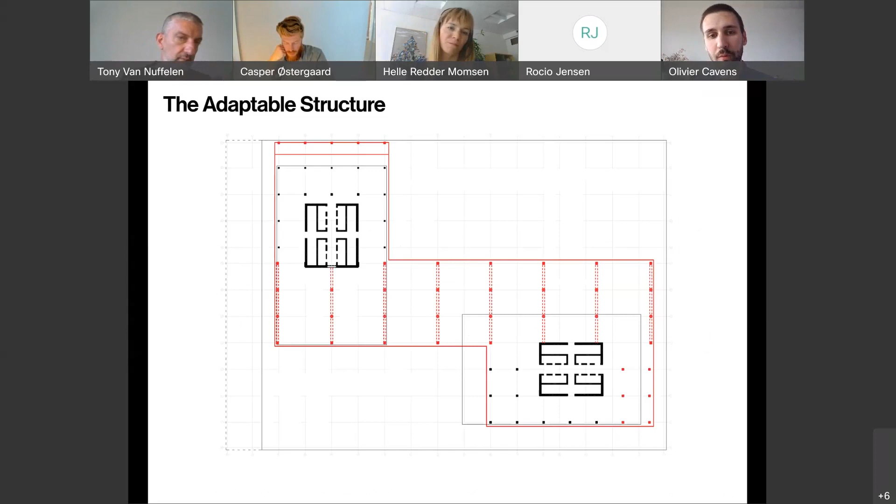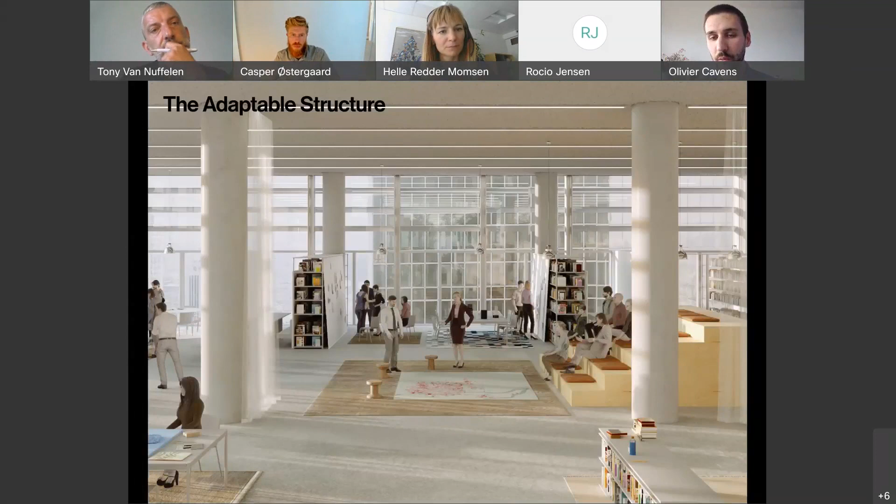What we installed as a project was based on the nature of this building, with its 5 floors underground and 2 circulation cores of the actual towers, rebuilding a new project around it. Here you see in black the 2 towers, and in red the new project we gave shape around them, connecting the 2 towers to each other and making a lot more use possible—not only limited to the standard offices as constructed back then, but delivering environments with double height spaces, a new volume in between the towers, and also residential and hotel program, breaking the building from a monofunctional one into a multifunctional one.

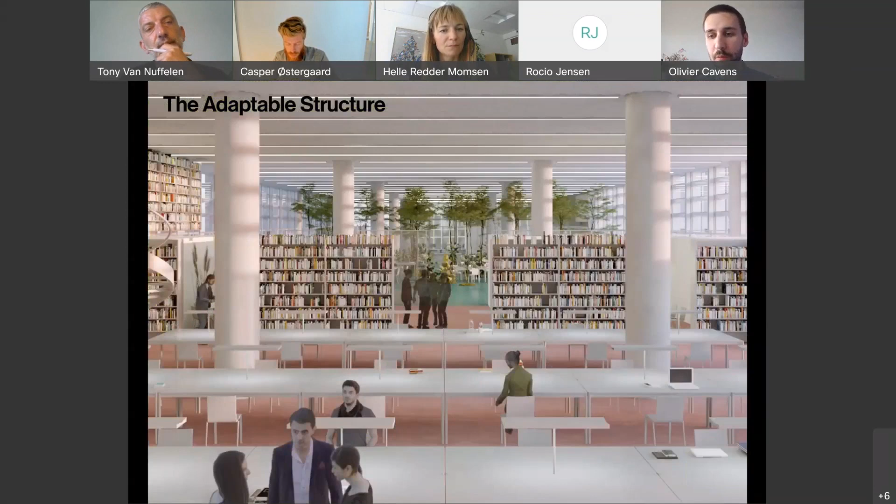So what you see here is the 2 towers as they were. We kind of remake them in the same way, around 2 cores, and we have the new volume put in the middle.

In the new volume, this is fully office program, or public program, a new program, and these floors are double high. These floors connect only to one out of two floors in the towers. So what you see is that we continue these floors into the towers each time. And on the floors where the double high volume doesn't have a connection, we put

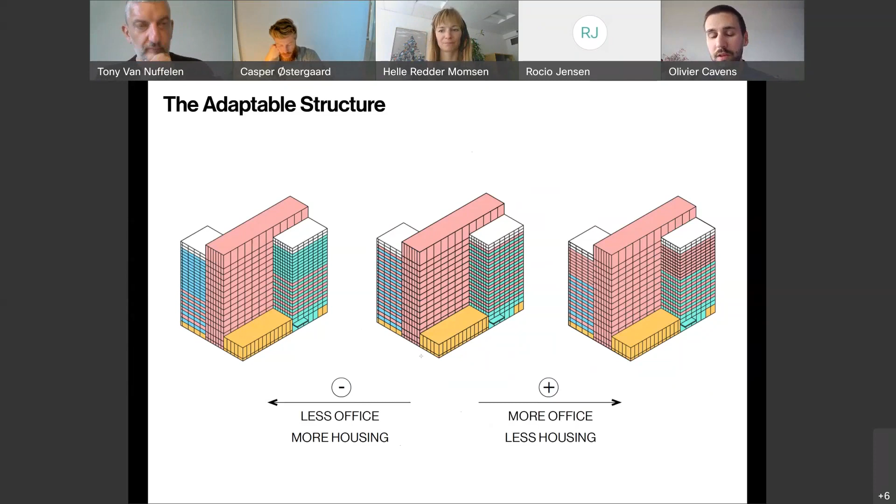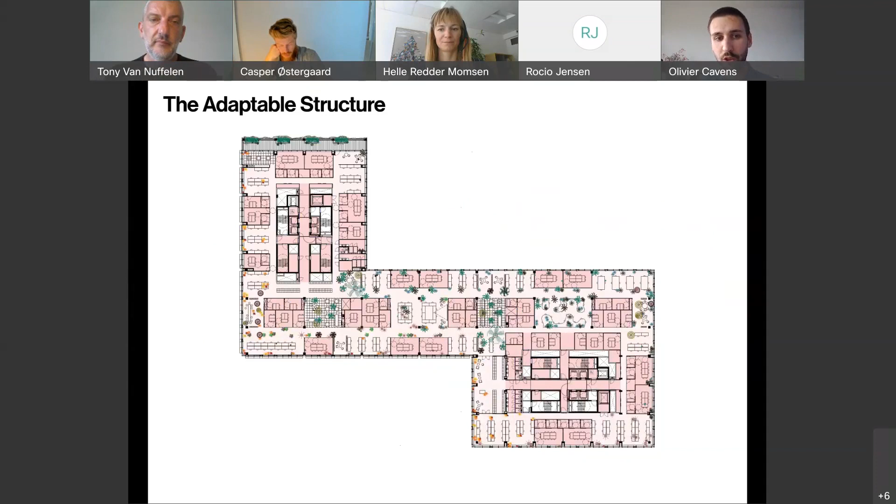So this is a floor plan of the offices where you see the two circulation cores with the new volume in the middle, which is a fully open space connecting the two towers. Then the floors in between with the apartments and hotel rooms.

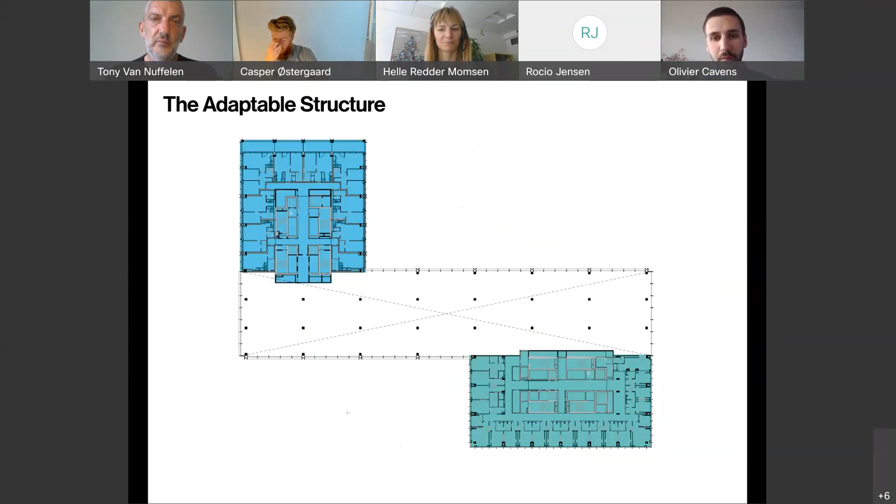And this is the architecture that it delivers then, which is also a hybrid architecture, and which I think is really the key of thinking circular: this architecture does not express a program, because the towers have one architecture behind which residential, hotel, offices or other uses could take place, but which is more an urban architecture that can over time take these evolutions and doesn't restrict itself in terms of what it could become in the future.

And the last part I want to share with you, of course, which was one of the main drivers of this project, is that this inactive socle of the building needed to be really opened up and become a location in the city, because at this moment, how it was today, this was really a dead spot in the city. So we really opened up the socle.

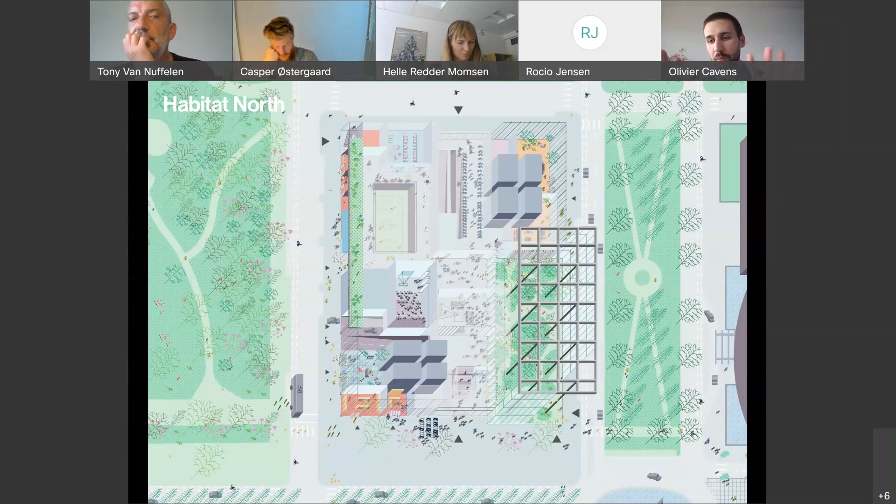So the socle is completely different, and we multiplied the addresses. There is a large greenhouse, little shops, a sports center, the apartment lobby, a fitness, a hotel lobby, a large bicycle stand. All these different functions have their own entrance, so they can also operate completely independently. There is no interdependence of these functions, which is also crucial so the building can evolve and actually have all the functions have their own comfort and needs, let's say.

So with this greenhouse that we construct, which is completely public and where people can go in and do this type of events, and where people can have a drink or meet — I think this is also crucial, and this is the actual goal of making projects. It's not the goal of putting materials together, but actually making something interesting with it, something which gives purpose to the space we inhabit daily. Thank you.

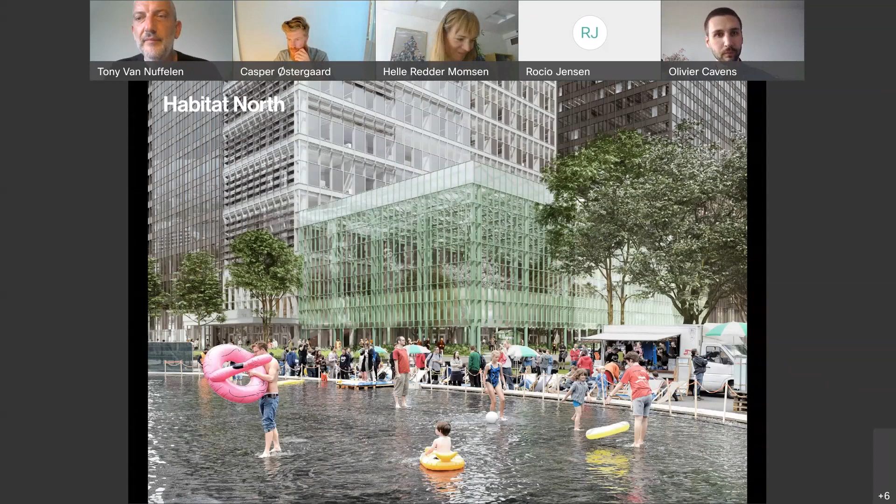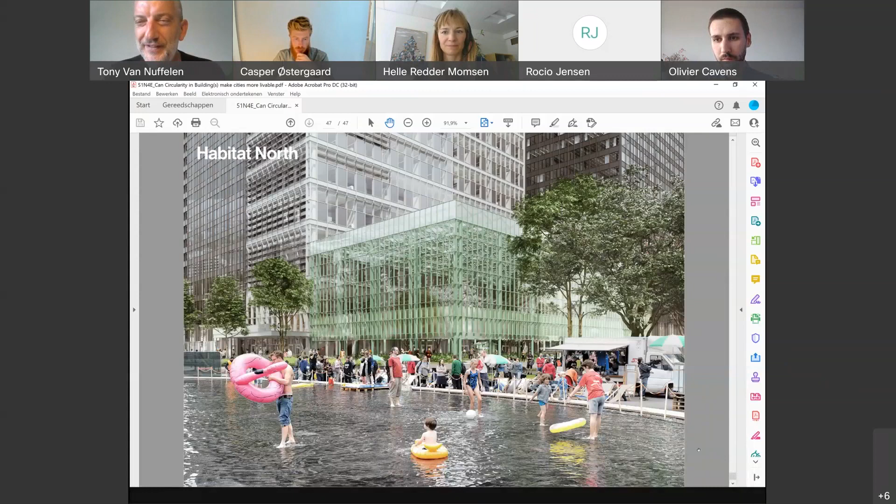In the questions and answers, there is a question specifically about whether an obstacle for circular economy is the fact that dumping waste is far too cheap. Maybe if Koen Peters, who formulated this, wants to add something, he can take the floor. But I think that's a question probably for the practitioners who have given concrete examples, that circular economy is probably about not making everything dumping waste. And then it is probably related to another question, the financial evaluation.

Probably some of the demolished buildings' materials can be a dumping waste, but how can you reduce this, and how do you deal with the costs and winning money? Do you compare the reused materials to what is the market today? How do you make a financial evaluation? And how do you handle the logistics, as we saw in the last example near the canal? I think it applies to Bornholm, the resource block project, and maybe the WTC towers in Brussels. Maybe someone can react to this.